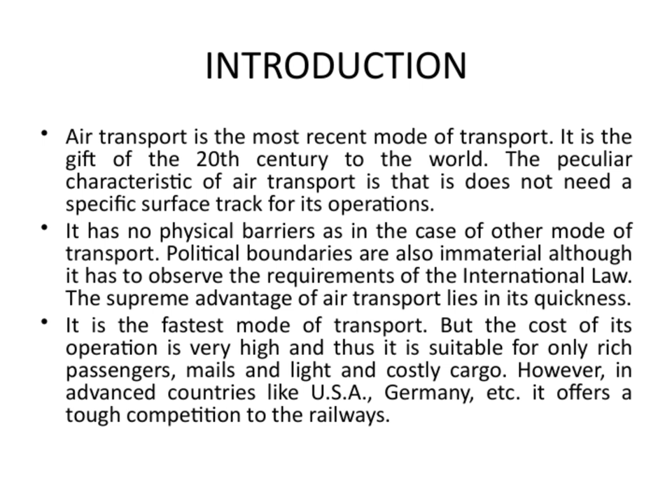Let's take a closer look at the characteristics of air transport. First, it offers an unbroken journey, meaning it can cover land and sea without interruption. This makes it incredibly efficient for connecting distant places quickly. Speaking of speed, air transport is the fastest mode of transportation available, which is one of its biggest advantages. However, it's also important to recognize that this speed comes with a cost.

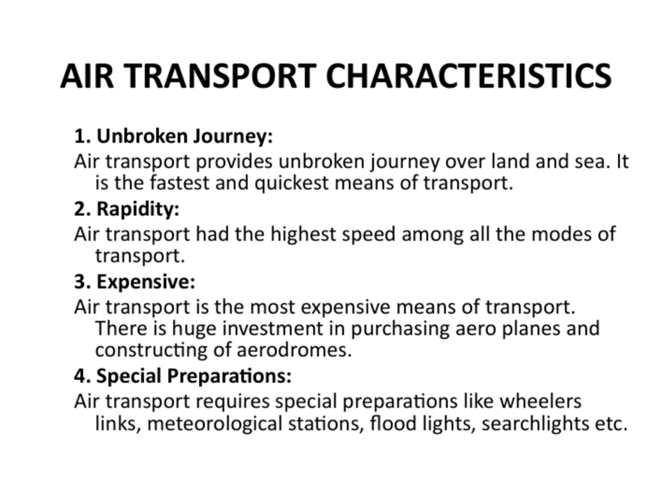Air travel is the most expensive mode, primarily because of the significant investments required in purchasing aircraft and building infrastructure like aerodromes. Lastly, air transport demands special preparations. This includes facilities such as wireless links, meteorological stations for weather monitoring, floodlights, and searchlights to ensure safety and smooth operations. These features highlight the complexity and the specialized nature of air transport, which is crucial to understand within the broader context of transportation development.

Let's start by looking at the first point: high speed. One of the biggest advantages of air transport is its incredible speed. It's actually the fastest mode of transportation available today, which makes it especially useful when time is a critical factor. Whether you're transporting urgent goods or need to reach your destination quickly, air travel is often the best choice.

Moving on to the second point: comfortable and quick services. Air transport offers a regular schedule, and the experience tends to be quite comfortable for passengers. It's efficient and allows for quick movement of people and goods, saving valuable time and energy. This is why many businesses and travelers prefer it for its convenience.

Next, we see there's no investment needed in the construction of tracks. Unlike trains or ships, airplanes don't require extensive infrastructure like tracks or roads. This means less capital expenditure up front and lower maintenance costs, which can be a significant advantage for countries or companies looking to expand their transport options efficiently.

Now, let's talk about no physical barriers. Air travel follows the most direct routes, which often means shorter travel times. Since it doesn't have to contend with mountains, seas, or forests in the same way ground or sea transport does, it can take more direct paths. This helps in reducing the overall journey time and increases efficiency.

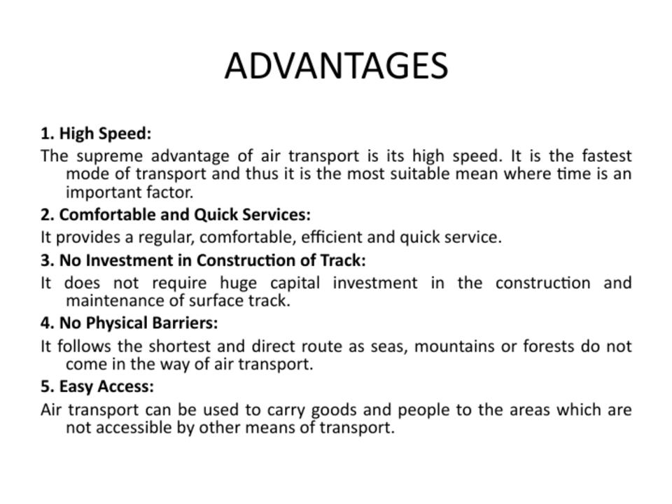Now, let's talk about emergency services. One of the key advantages of air transport is that it can operate even when all other means of transport are halted, such as during floods or other natural calamities. This makes it the only mode of transport capable of reaching affected areas quickly to carry out relief work and deliver essential commodities like food, water, and medical supplies.

Moving on to quick clearance, in air transport, customs formalities are generally processed very rapidly. This speed helps avoid delays, ensuring that goods and passengers reach their destinations without unnecessary waiting, which is crucial in emergencies or time-sensitive situations. Next, let's consider its suitability for carrying light goods of high value.

Air transport is ideal for perishable items that need quick delivery, such as fresh produce or medicines. It's also perfect for transporting high-value, lightweight goods like diamonds or bullion over long distances, because it ensures safety and speed.

Now, looking at national defense, air transport plays a vital role here as well. Modern warfare relies heavily on aircraft, which can quickly reach and strike targets, providing a strategic advantage. Airplanes can destroy enemy targets in a very short period, and they support the overall defense infrastructure of a country.

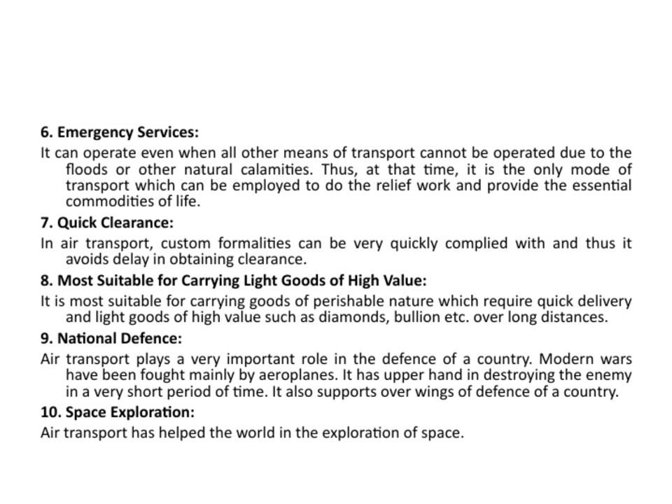Finally, air transport has contributed significantly to space exploration. It has helped scientists and engineers reach outer space, enabling us to explore beyond our planet and expand our understanding of the universe. All these points highlight how versatile and essential air transport is in various critical sectors, aligning with our overall theme of its importance in modern infrastructure and global connectivity.

Air transport is known to be the costliest means of transportation. The fares are so high that, for most people, it's simply out of reach, making it less accessible for the average traveler. Another important point is its small carrying capacity.

Unlike ships or trains, aircraft can't carry large or bulky goods economically, especially if they are cheap or heavy. This limits its use primarily to passengers and high-value or urgent cargo.

Air transport also comes with a lot of uncertainty and unreliability. Weather conditions play a big role in flight schedules. Fogs, snow, heavy rains - these unfavorable weather conditions can lead to cancellations or delays, which disrupt plans and make air travel less dependable.

Then there's the risk factor: breakdowns and accidents. Compared to other modes of transport, the chances of technical failures or accidents are higher, which makes air travel inherently riskier and more costly in terms of safety measures.

Finally, the high investment required is another major disadvantage. Building and maintaining aircraft, airports, and infrastructure demand huge capital. Plus, operating this system requires highly trained and skilled personnel, adding to the overall costs.

All these factors highlight why, despite its speed and efficiency, air transport has significant disadvantages that influence its overall use and accessibility.

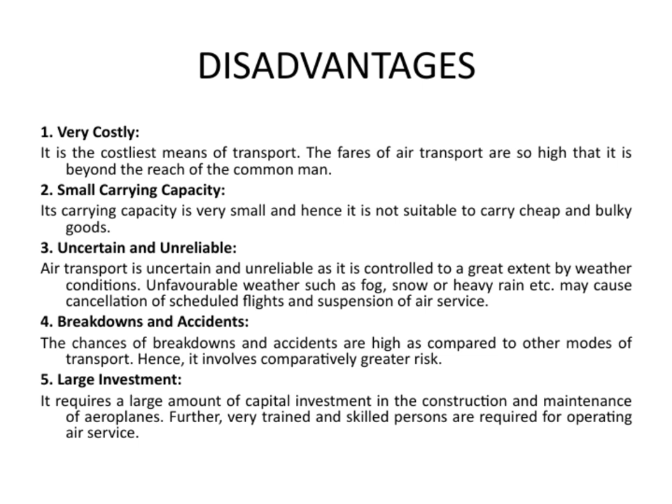Air transport, as we've discussed, requires a very specialized skill set. It's not just about flying. It demands a high level of training and expertise to operate safely and efficiently. This means that only trained professionals can handle the complexities involved, which adds to the overall cost and skill requirements of air transport.

Now, moving on to a different aspect, its suitability for certain types of goods. Air transport is actually not ideal for cheap, bulky, and heavy items.

The main reasons are limited capacity and the high costs involved. Because aircraft have space and weight restrictions, shipping large, heavy, or inexpensive goods by air simply doesn't make economic sense. It's more suitable for high-value, time-sensitive items rather than bulk commodities.

Lastly, there are also legal restrictions that impact air transport. Different countries impose various regulations to protect their own national unity, peace, and security. These restrictions can affect flight routes, cargo, and even the operation of airlines, adding another layer of complexity to international air transport.

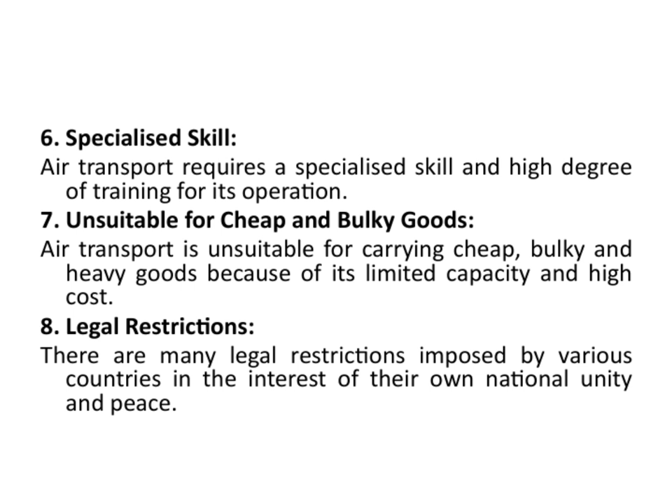In the context of our overall discussion, understanding these limitations helps us appreciate the strategic choices involved in air freight and how it fits into the broader logistics network. Let's take a closer look at airport classification.

There are also categories based on size and capacity, such as regional, major hubs, or small local airports. These distinctions influence infrastructure, services offered, and even the economic impact of each airport.

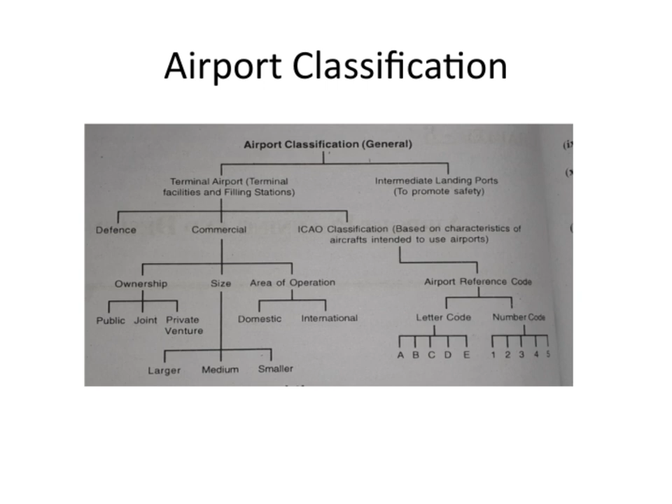So, recognizing these classifications allows us to better analyze airport operations and planning strategies. Overall, categorizing airports helps us understand their specific roles and how they fit into the global transportation system.

Let's take a look at how different types of airports are classified based on takeoff and landing methods. First, we have the conventional takeoff and landing airport. These airports typically feature longer runways, usually more than 1,500 meters, which allow for standard aircraft operations. They are designed to accommodate larger aircraft that require more space for safe takeoff and landing.

Next, we have the reduced takeoff and landing airport. These airports have shorter runways, ranging from about 1,000 to 1,500 meters. They still support regular aircraft, but with some operational limitations due to the reduced runway length. It's important because it allows air traffic in more constrained environments.

Then, there are the short takeoff and landing airports, with runways between 500 and 1,000 meters. These are often used for smaller aircraft or specialized operations, like regional flights or private jets. They're crucial in areas where space is limited but still need to support aviation activities. Finally, we have the vertical takeoff and landing airport, which is quite different.

These airports operate in a very small operational area, roughly 25 to 50 square meters, and rely on vertical lift technology, like helicopters or VTOL aircraft. It's a fascinating category because it enables operations in very confined spaces, often in urban or inaccessible areas.

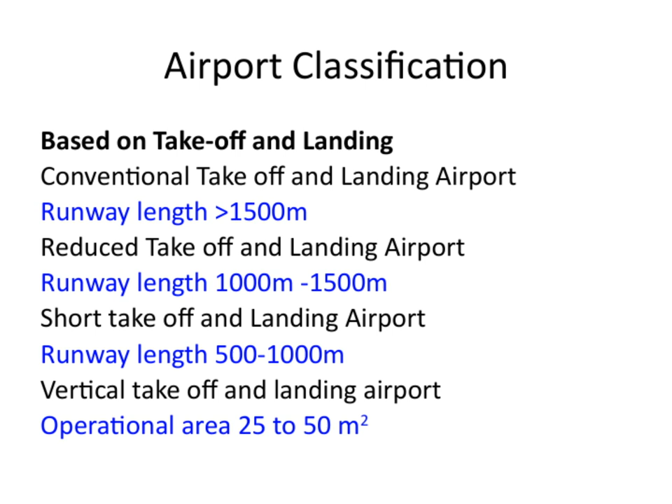As you can see, airport classification depends greatly on the runway length and operational area, which directly impacts the type of aircraft that can operate there. This classification helps us understand the infrastructure requirements and the operational scope of different airports within the overall aviation system.

Now, let's take a look at the different categories within aviation. First, we have civil aviation, which is all about the non-military aircraft used for various purposes. Civil aviation can be divided into two main types: international and domestic. International civil aviation involves flights that cross country borders, connecting different nations and facilitating global travel and trade. Domestic civil aviation, on the other hand, focuses on flights within a single country, serving internal routes and connecting cities and regions. Then we have military aviation, which is dedicated to the defense and security of a nation.

Military aircraft are used for combat, surveillance, transport, and training purposes. Unlike civil aviation, military aviation is primarily driven by strategic and defense needs rather than commercial or passenger services. Understanding these categories helps us see how diverse and specialized the field of aviation is, with each sector playing a vital role in our interconnected world. This classification also highlights the different operational requirements and regulations that govern each type, which is crucial as we explore the broader scope of aviation in this presentation.

Now, let's take a closer look at how reference codes are structured. They consist of two main elements. First, we have the code numbers, which range from 1 to 4. These numbers are used to classify the length of the available runway. Essentially, they help us quickly identify whether the runway is suitable for different types of aircraft based on its length.

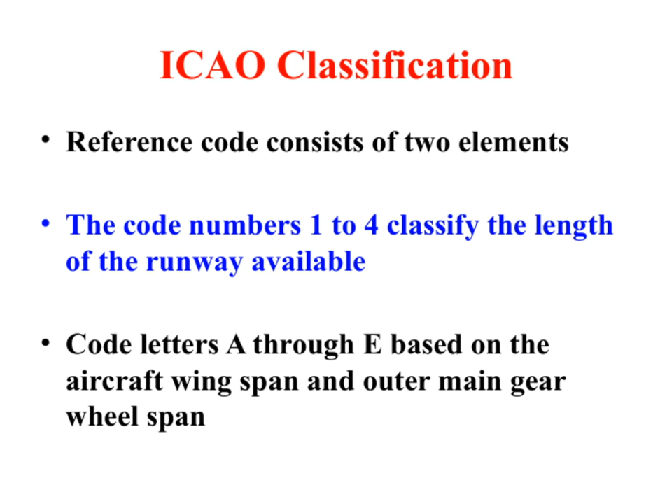Today, I want to introduce you to the two broad categories of airports, which are essential for understanding how they're classified and managed. The first category is utility airports. These airports primarily serve general aviation, including private and recreational flying, and often support local communities and smaller aircraft. The second category is transport airports, which are larger facilities designed to handle commercial airline traffic, cargo, and passenger services, playing a vital role in connecting cities and regions.

Now, when we look at FAA classifications, they often use these broad categories to help organize and regulate airports effectively. Recognizing whether an airport falls into utility or transport helps determine its design, infrastructure needs, and operational priorities. In the bigger picture, understanding these classifications gives us insight into how airports serve different functions within the national transportation network. It also helps us appreciate the diversity in airport types and their specific roles in supporting economic growth and mobility.

Let's take a closer look at how the FAA categorizes different aircraft approaches. They define 5 approach categories, each based on the aircraft's approach speed. Now, this approach speed is not just any speed. It's specifically determined by taking the stall speed in the landing configuration and multiplying it by 1.3. Why is this important? Well, the stall speed here is measured at the maximum certified landing weight, which means we're considering the aircraft at its heaviest and most critical state.

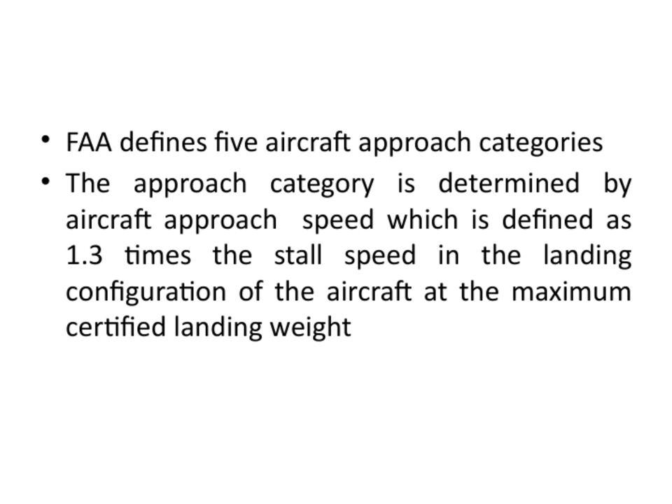This approach speed helps us understand the aircraft's behavior during approach and landing, and it's crucial for designing safe and efficient approach procedures. Connecting this to our overall theme, understanding these categories allows us to appreciate how aircraft performance influences approach planning and safety standards. It ensures that pilots and controllers are on the same page when managing aircraft of different sizes and speeds.

So, when it comes to geometric design standards, the FAA has a specific way of categorizing aircraft. They define these categories using what are called airplane design groups, and these groups are determined primarily based on the wingspan of the critical aircraft. That is, the aircraft with the largest wingspan that the airport needs to accommodate safely. Understanding these design groups is crucial because they influence the layout of runways, taxiways, and other airport facilities.

Essentially, they help ensure that the airport infrastructure can handle the aircraft types it's expected to serve, maintaining safety and efficiency. This classification ties into the overall theme of airport planning and safety standards, making sure that every aspect of the design caters to the aircraft it will host, especially the larger, more demanding ones.

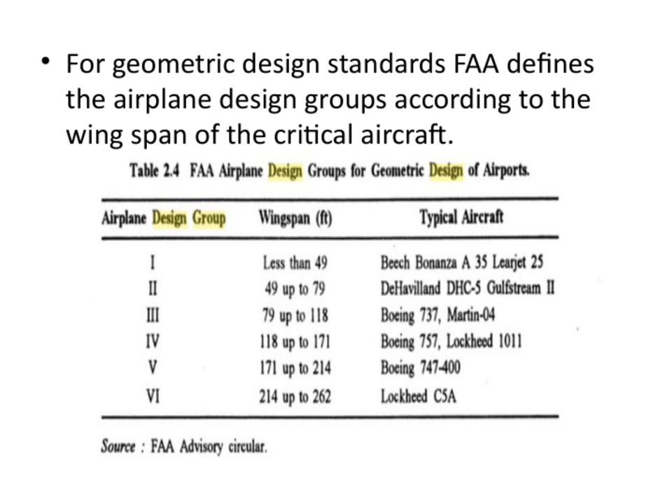The goal of a master plan is to provide clear guidelines for future airport development. It's about planning ahead to meet the growing aviation demand in a way that's financially feasible. At the same time, it's crucial to address the environmental and socioeconomic issues that exist within the community. As the FAA emphasizes, a good master plan balances these factors, ensuring the airport can grow and serve travelers effectively, while also being mindful of its broader impact. This approach helps us create a sustainable, well-organized development pathway that benefits both the airport and the surrounding community.

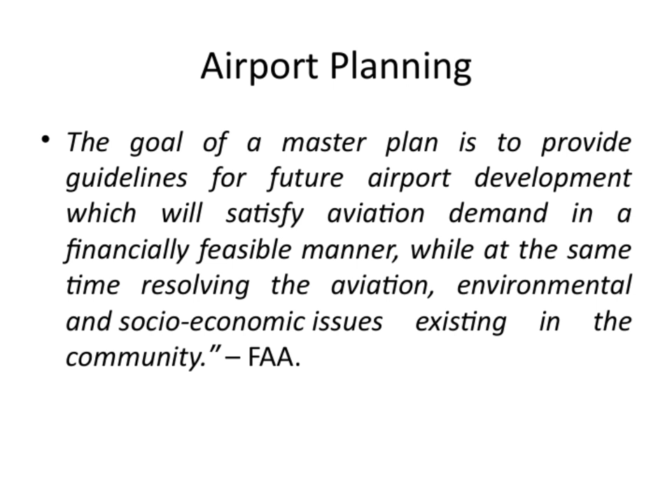This slide doesn't contain enough information. That's why we're moving to the next slide.

When we talk about the airport master plan, we're really referring to the planner's idealized vision of how the airport will develop in the future. It's like a blueprint that outlines the desired form and structure of the airport's ultimate development. This plan isn't just about today's needs. It's about imagining what the airport could become over time, ensuring it can grow efficiently and effectively. Master planning is versatile. It applies not only when building new airports from scratch, but also when significantly expanding existing facilities. Whether we're starting fresh or upgrading what's already there, the master plan guides us through those complex processes.

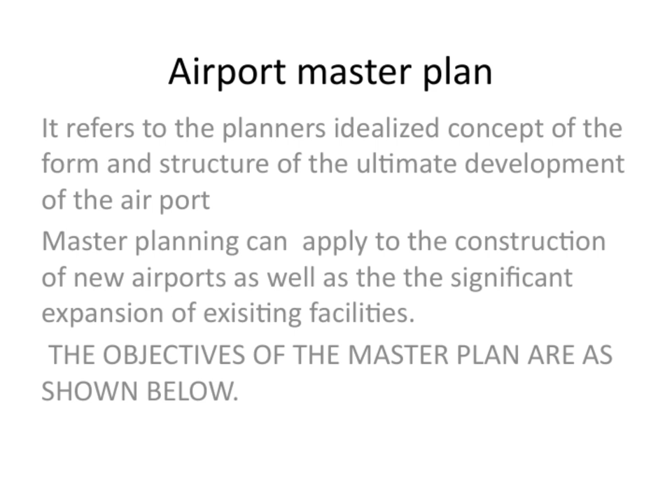Now, the objectives of this master plan are key to understanding its purpose. They serve as the foundation for how we approach airport development, helping us align our efforts with long-term goals. We'll explore these objectives in detail to see how they support creating a well-structured, future-proof airport that meets the needs of passengers, airlines, and the surrounding community.

Now, let's look at the key objectives for this part of our planning process. First, we aim to provide an effective graphical presentation of the ultimate development of the airport itself, along with the anticipated land uses surrounding it. This visual approach helps us better understand how the airport will evolve over time and how the neighboring areas will be utilized. Next, we're establishing a clear schedule of priorities and phasing for the various improvements outlined in the proposed plan. This step is crucial because it allows us to prioritize projects and implement them in a logical sequence, ensuring efficient use of resources and minimal disruption.

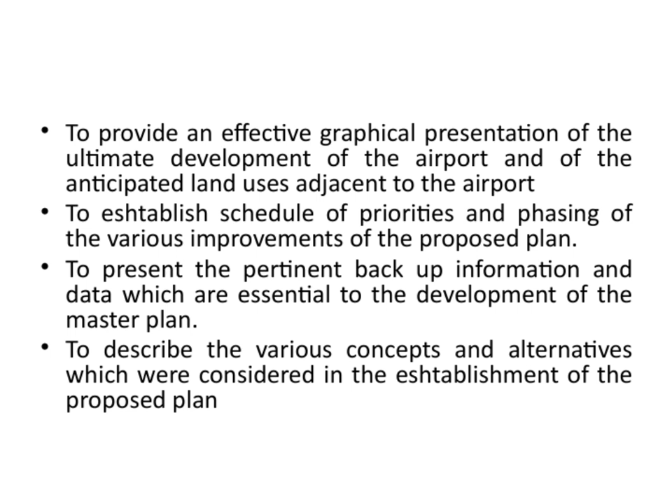We also want to present all the relevant backup information and data that are essential for developing a comprehensive master plan. This includes technical details, forecasts, and supporting analyses that underpin our decisions. Finally, we'll describe the different concepts and alternatives we considered during the planning process. Exploring these options helps us understand the reasoning behind our chosen approach and ensures that we have thoroughly evaluated all possible solutions before finalizing the plan. Together, these points form the backbone of our strategy to develop a well-informed, practical, and forward-looking airport master plan that aligns with both current needs and future growth.

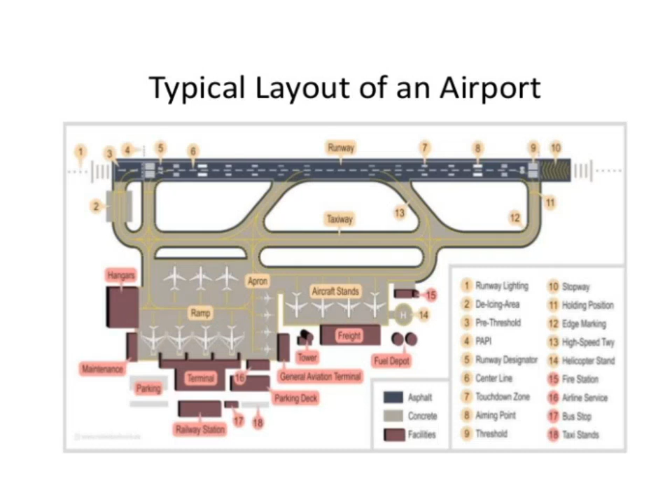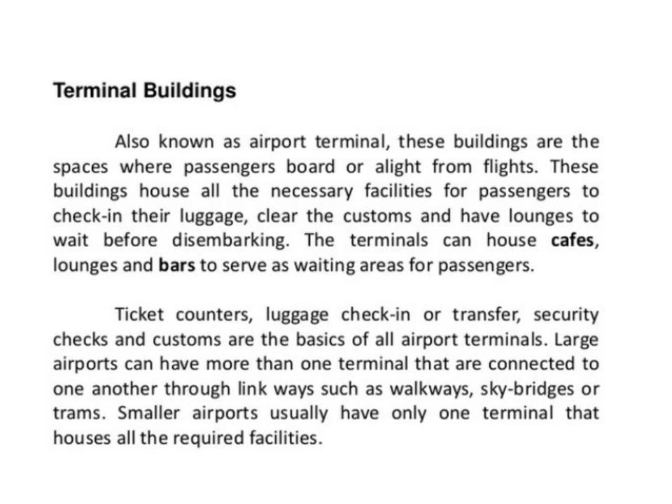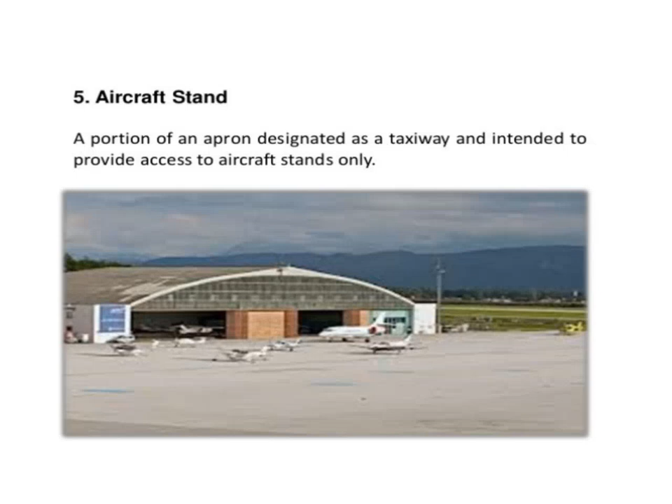This slide doesn't contain enough information. That's why we're moving to the next slide.

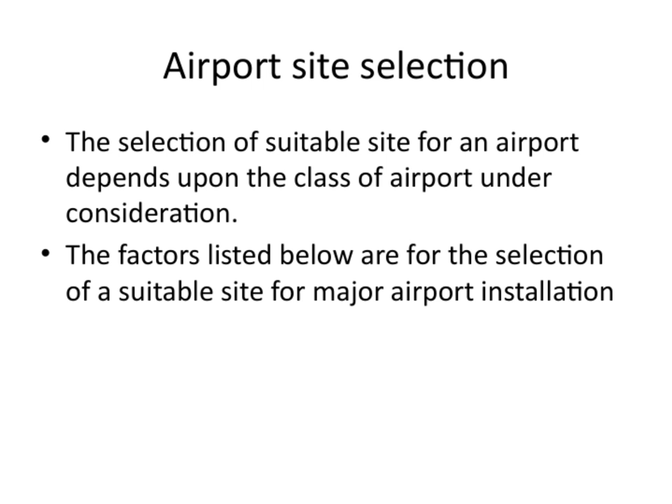The selection of a suitable site for an airport really depends on the type of airport we're planning to develop. Different classes of airports have different requirements, so the site choice isn't one size fits all. When we look at major airport installations, there are several key factors to consider. These factors help us identify the most appropriate location that will support the airport's operations efficiently and safely. It's important to evaluate aspects like accessibility, topography, and land availability, among others. All of these elements come together to ensure that the airport can serve its intended purpose effectively. So, in essence, choosing the right site is a foundational step that influences not just the construction, but also the future operations and overall success of the airport.

When we're considering the regional plan for the airport, there are several key factors to keep in mind. First, airport use is crucial. Understanding how the airport will be utilized helps shape the entire development. Next, proximity to other airports can influence traffic flow and logistical planning, so it's important to assess how close we are to existing facilities. Ground accessibility is another vital point.

We need to ensure that transportation routes to and from the airport are efficient and reliable. Topography plays a significant role as well, because the land's natural features can impact construction and operations. We also have to be mindful of obstructions and visibility issues, which could affect safety during takeoffs and landings. Wind conditions are another critical factor, as they influence flight patterns and airport design. Noise nuisance is something we must consider, especially in relation to nearby communities, to minimize disruptions.

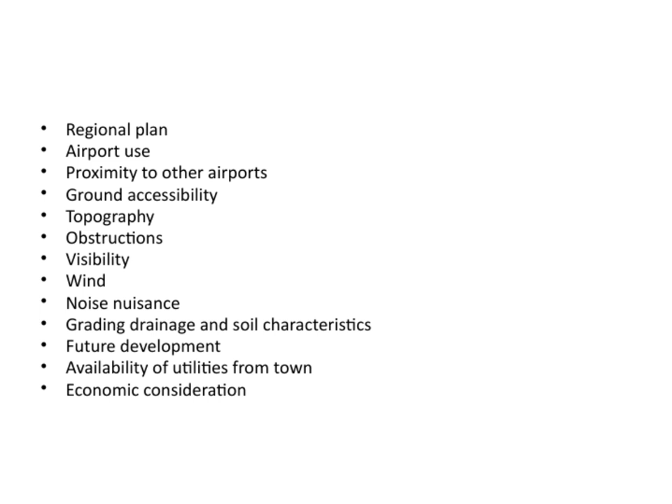Grading, drainage, and soil characteristics are fundamental for establishing a stable foundation and managing water flow effectively. Looking ahead, future development potential must be evaluated to ensure the site can accommodate growth. Availability of utilities from the town, such as water, power, and telecommunications, is essential for smooth operation. Lastly, economic considerations tie everything together. Understanding the costs and potential benefits helps us make informed decisions that align with broader regional goals. All these elements, when integrated thoughtfully, support a comprehensive regional plan that promotes efficient, safe, and sustainable airport use.

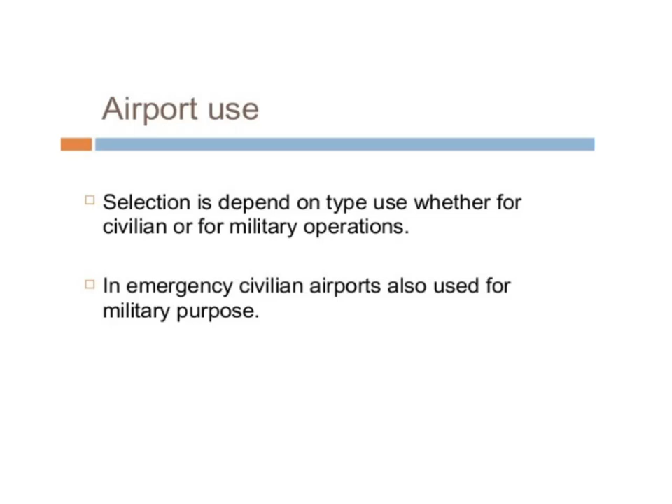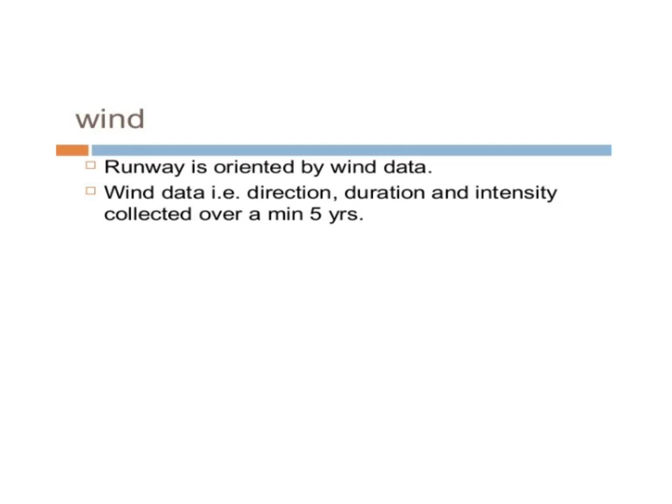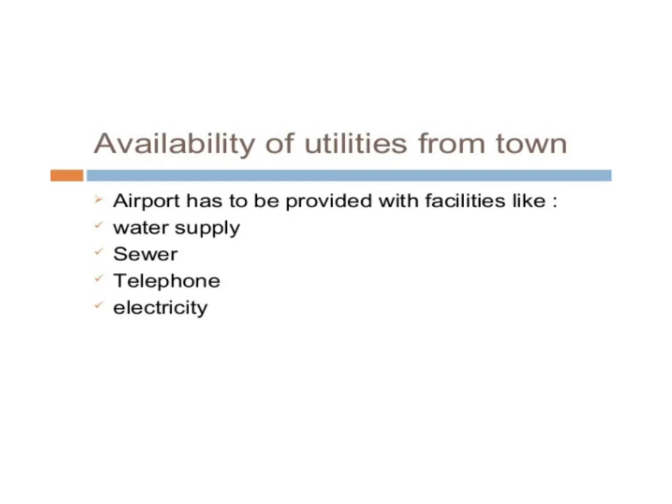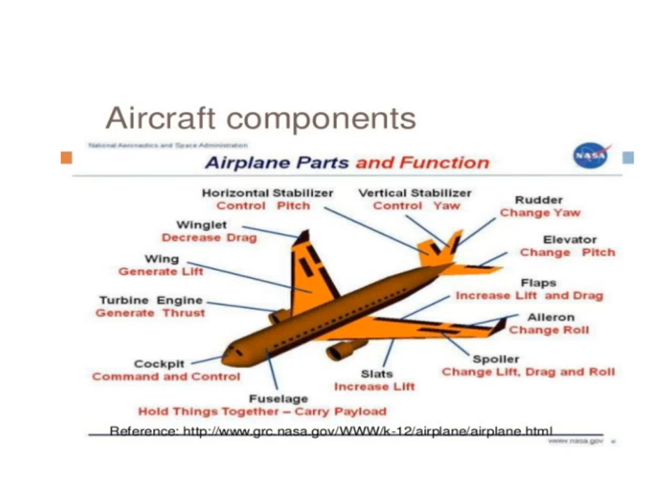Let's take a closer look at the parking and circulation area. This part of the design is crucial because it directly impacts how easily people can access and move through the space. Efficient parking layout not only enhances user convenience, but also contributes to the overall safety and functionality of the site. When we talk about circulation, we're referring to the flow of vehicles and pedestrians, ensuring that movement is smooth and logical. Properly planned circulation minimizes congestion and reduces potential conflicts between pedestrians and vehicles.

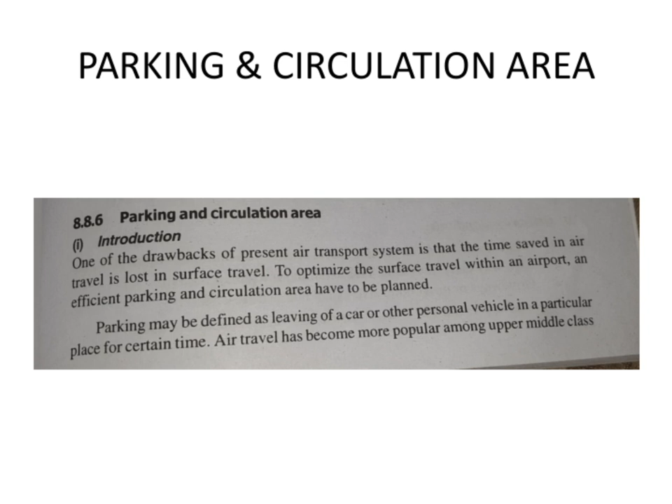It's important to highlight that a well-designed parking and circulation plan supports the overall theme of creating a user-friendly, sustainable, and accessible environment. By paying attention to these details, we help ensure the space is welcoming and efficient for everyone who uses it.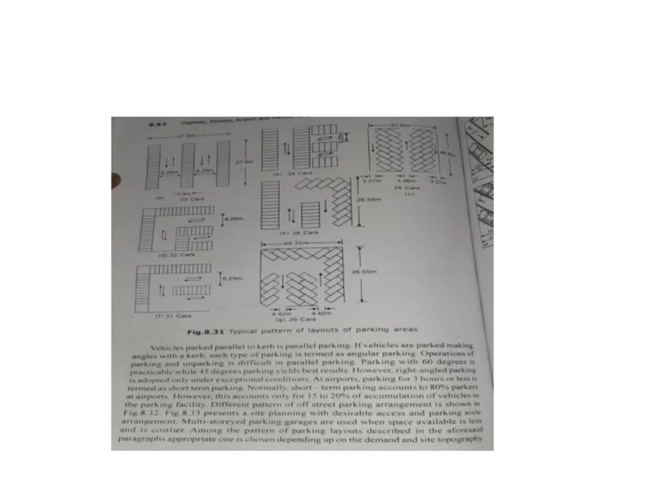This slide doesn't contain enough information. That's why we're moving to the next slide.

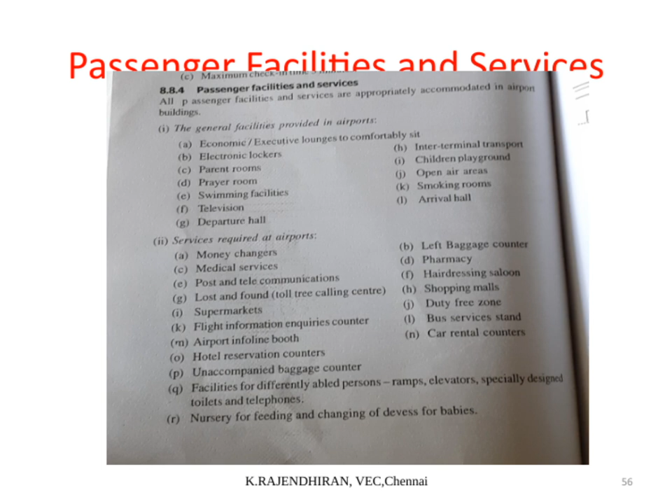Highlighting the key point, the overall goal is to make every passenger's experience seamless and pleasant, encouraging more people to choose public transportation. Connecting this to the broader theme of sustainable and efficient transit systems, excellent facilities and services not only improve user satisfaction, but also promote greater usage, contributing to environmentally friendly urban mobility. So, in essence, passenger-centric facilities and services are vital pillars in creating a transportation network that is reliable, accessible, and welcoming for everyone. Thank you.